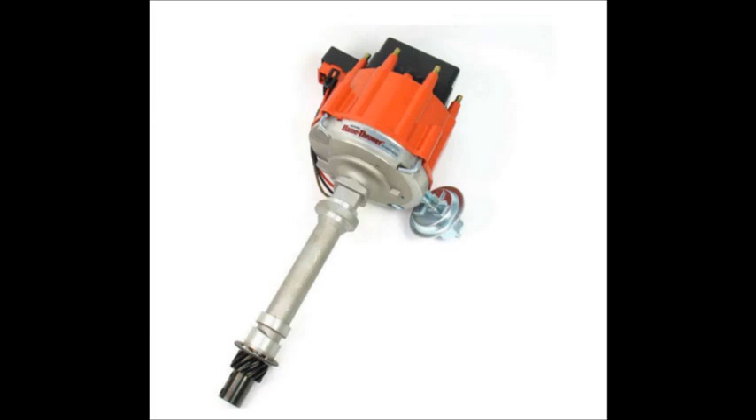Hi, today's topic is going to be about setting timing on a souped-up, performance engine. It's a bit different to set timing on a stock engine.

Most times on the stock engine in these older cars, there'll be a sticker, maybe on the hood or on the radiator support, that tells you to set the timing at 10 degrees curb idle. My father had an old Plymouth once that said set it at 0 degrees curb idle. These numbers are not appropriate for a souped up engine.

In this engine here, I'm going to use mine as my first example because it's a real world example. I set the total timing at 38 degrees. I set the curb idle timing at 14 degrees. It's a Pertronix distributor that has 24 degrees of mechanical advance, so 24 plus the 14 is 38.

This works really well for these 350 Chevys with the dish pistons. If you have an engine with flat tops where you have an effective quench, the total timing might be better at 36 degrees or 35. But with this engine, it has the original dish pistons in it.

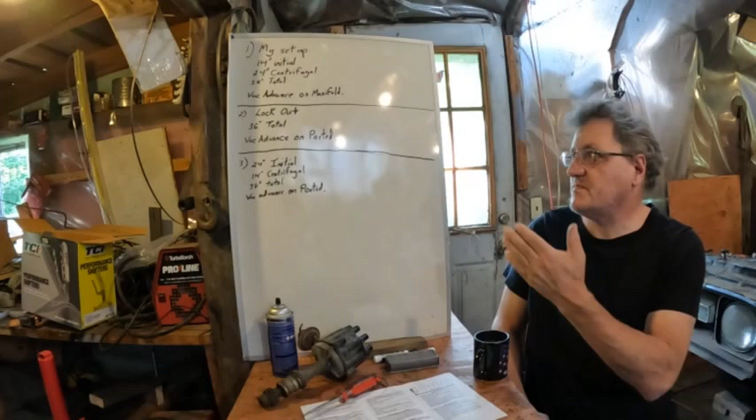I mean, you're looking at an engine where compression was raised a little bit, 9 3/4. It has sort of a middle of the road cam, 228 at 50. So that setup, I think, works great for the majority of hot rod engines out there. Maybe not those specific settings, but hooking your vac advance to the manifold.

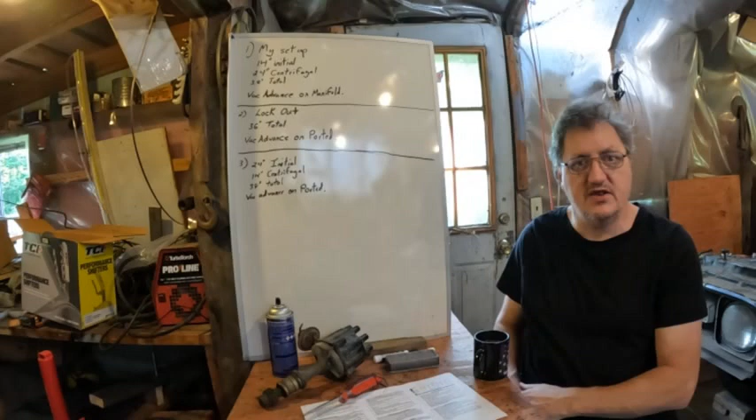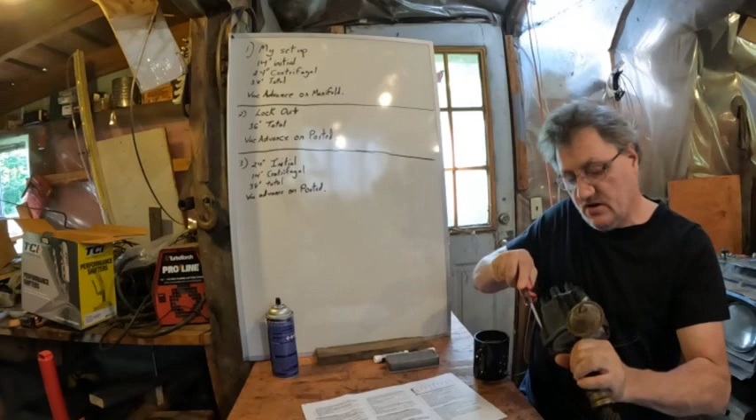I also recommend an adjustable vacuum advance canister. Mine has that. Obviously the car's not done, so I haven't road tested it yet, but when I do, I will likely adjust it. Another thing is, sometimes people have these old distributors, and like I've seen in like Uncle Tony's show, working with this old stuff is fun, and it is, if you have the patience for when things go wrong.

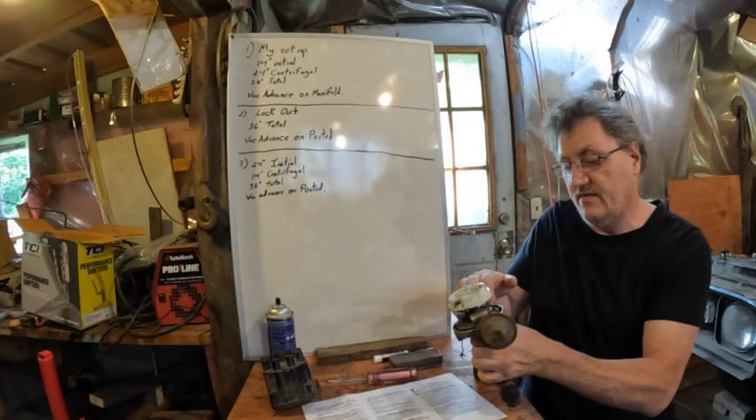But in here, you have, this thing has points. I believe this is an old Oldsmobile distributor, a spare one I have. Has a points ignition. It has the vacuum advance here, and underneath you have your centrifugal advance.

Now, a couple things people do with them, and this is leading to where you might do these the other way, is you could lock out this distributor. Okay, that's an old school way that I don't recommend. I'm not going to do it in any of my cars, but people do it. So if you put this in locked out at 36 degrees,

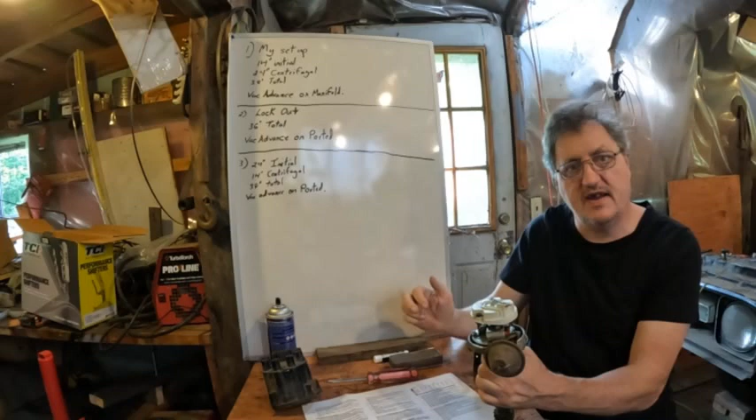that means you have 36 degrees at idle, and so that's a lot at idle already. I would not plug into manifold vacuum in that case. I would change out this canister for an adjustable canister, and I'd put vacuum advance on ported, and I'd start doing road tests to see how much vacuum advance it would take. And so if you have an old hot rod that's already been modified in this way, that would be a way to go to get it to work halfway decent.

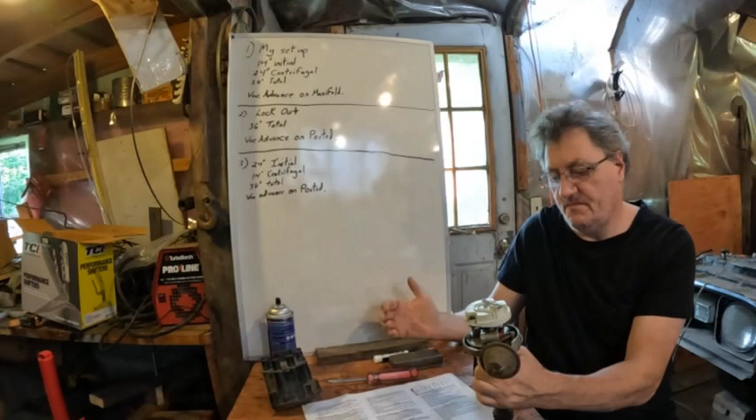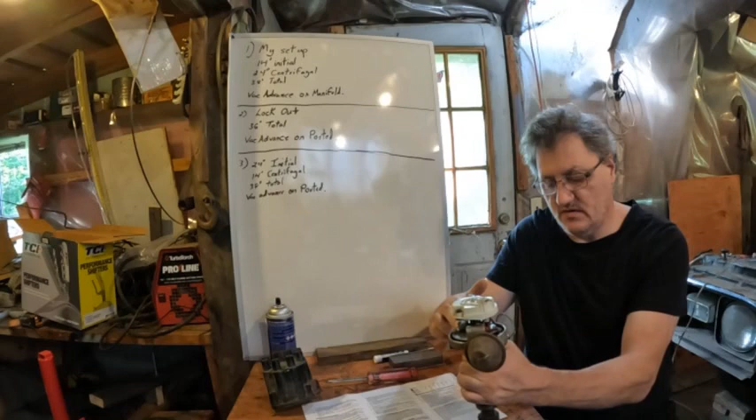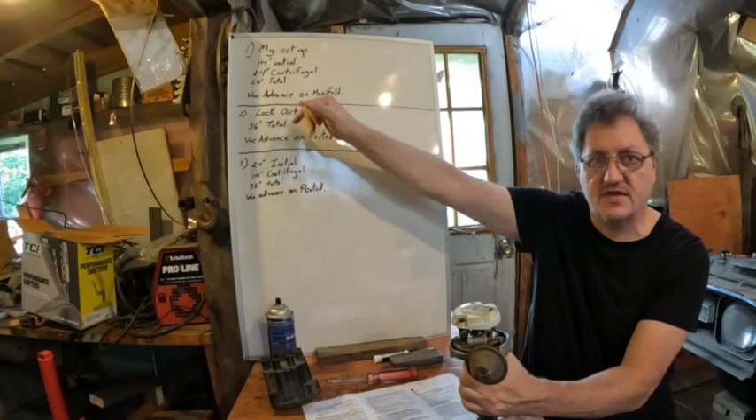Another thing that commonly happens, more common than locking them out, is people will recurve these distributors. They'll change the advance springs. Sometimes people limit the centrifugal advance. Like in this example, I said 14 degrees centrifugal, I just reversed that. That's a number that you could reach by limiting the mechanism in this distributor. So you'd say, okay, now we're running 24 initial and 14 centrifugal for a total of 38.

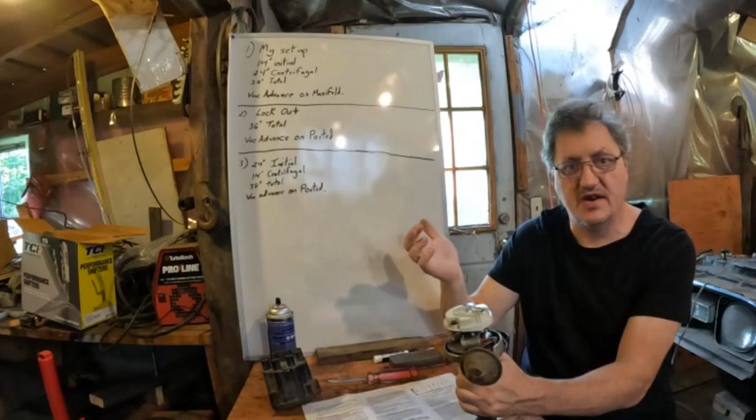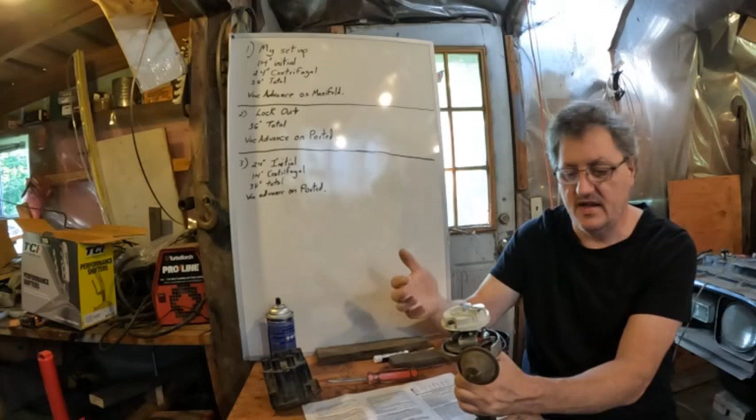Because I'm assuming I'm doing this thought process all on my engine, and that's where I would put it if I did that. Now that one I would also put the vacuum advance on ported. Unless you had the canister adjusted way down. But why would you do that? Because then it would be way down when you're driving it and defeat the purpose of the vac advance. So that's another case where you might do ported.

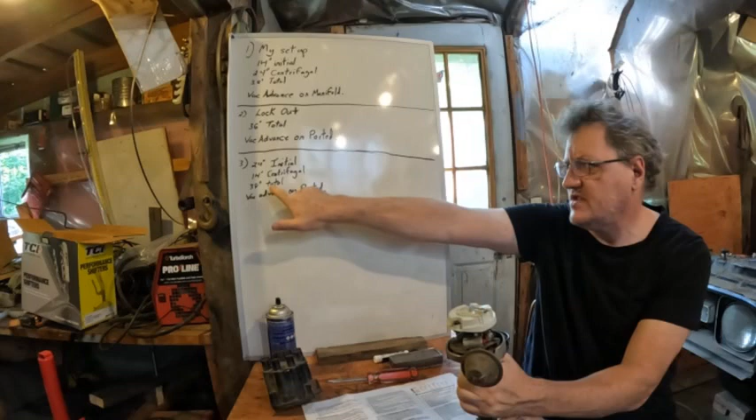And you might ask, well, why would you have your ignition set this way? That would be a good way to set your ignition if your engine is overcammed. You know, maybe you're just doing a rat rod and you swapped out the cam for the sound.

Okay, so you have 8-to-1 compression. It's a good wrench motor. You put a big cam in it for the sound, but now it's lazy on the low end because it's too much cam. Well, if you did that, that would bring back some of your torque. And also, with the vac advance on ported, it probably wouldn't spark knock, and you could adjust it to drive pretty good. So that's another example of where you would use ported vacuum in one of your hot rods.

So, to me, the reality is, when Andy from Motorsports says to do it on the manifold, he is absolutely right. And for him to say that, I get skeptical whenever somebody says always. The word always, there's an old adage that always never happens. Most of the time, because he's talking about engines that are built properly. He's talking about engines with parts matched up properly and about things done in more contemporary ways.

But if you're doing a nostalgia thing and you want to do everything the old way, because you're more for show and stuff like that, you might end up doing it this way to get it to run good with your old school distributor setup.